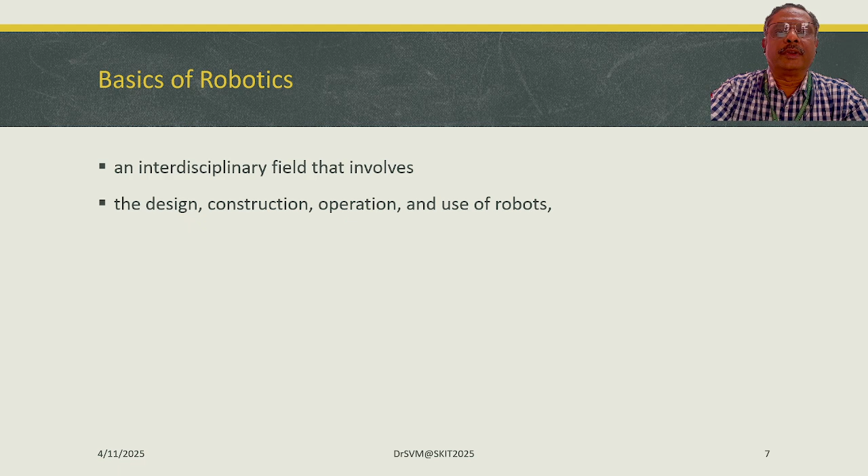Robotics is an interdisciplinary field that involves the design, construction, operation, and use of robots, which are focusing on creating intelligent machines. The major focus is to create an intelligent machine that are created to assist humans in various tasks. The main objective of robotics is to create machines that can perform tasks, often repetitive or dangerous ones, more efficiently and accurately than humans.

That's where we began our journey, when we have activities that are more repetitive. It becomes boring for any human to do the same activity, the same action again and again. So when such a situation is there where some actions are to be repeated multiple number of times, then we would prefer some system like a robot to work on. Another situation was when it is dangerous, so it is hazardous for humans to operate. In such situations, it is recommended to use machines that can simulate human activities. So that's where we began our journey, with simple human activities that are more repetitive in nature and which are being performed in hazardous situations.

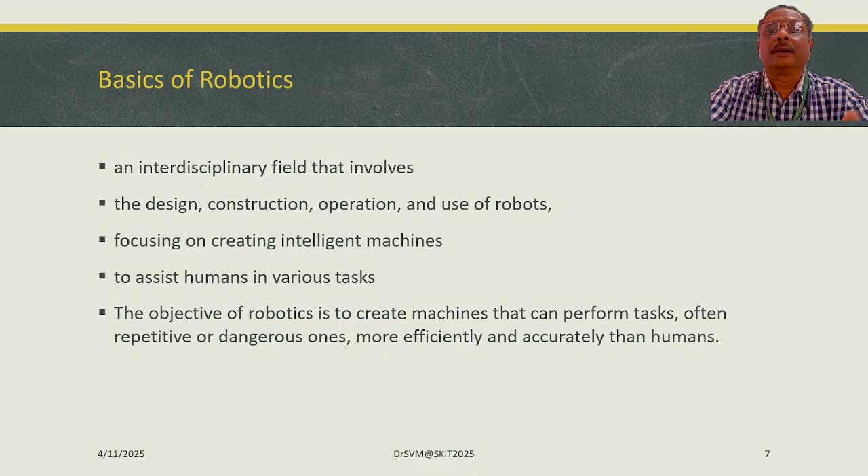The major idea was to replace humans in tedious tasks, or hazardous tasks, or tasks that require very high precision. So we can make a machine work with more precision as compared to humans. If tasks involve a hazardous environment, then instead of humans, we would prefer a machine to work with. If it is tedious, like it needs more repetitions, or if it requires more power to work on, then it would be advisable to go for machines instead of humans.

Then the next thing is to augment human physical as well as cognitive abilities. Yes, since centuries we have been augmenting the physical abilities of human through machines, but now we are into a situation where we can even think of augmenting the cognitive abilities of humans by a machine.

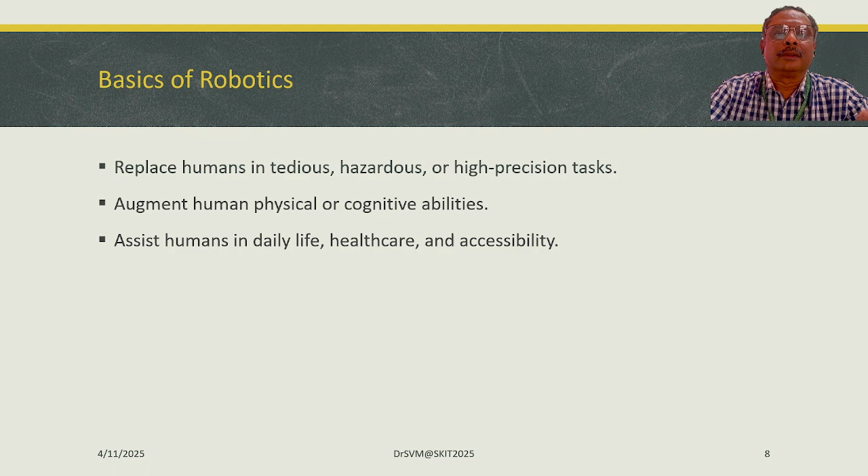Here, we would like to have robots that can assist humans in daily life, like healthcare, accessibility, and so on. So if it is healthcare, a human may forget things, but a machine cannot forget once it is properly programmed, once it is properly designed. So it would be easier, it is recommended for machines to assist the humans, to be precise, not replacing but assisting the humans in daily activities.

They are very much helpful to operate in extreme or remote locations where humans cannot reach. Extreme locations like where there is too much heat, too much cold, or lack of oxygen, or any such situation where humans can work only with great difficulty. In such situations, we can make our robots work there.

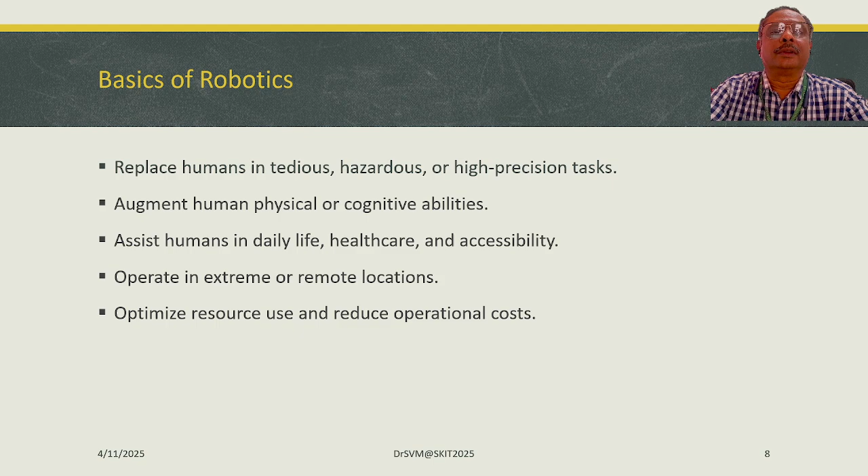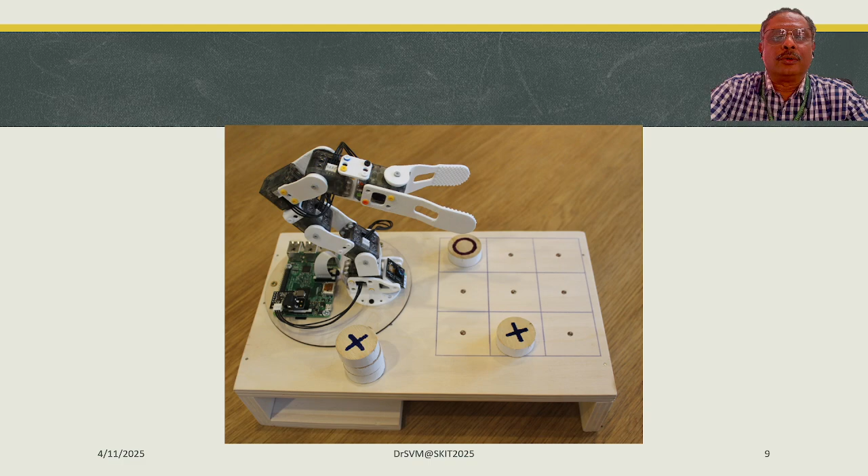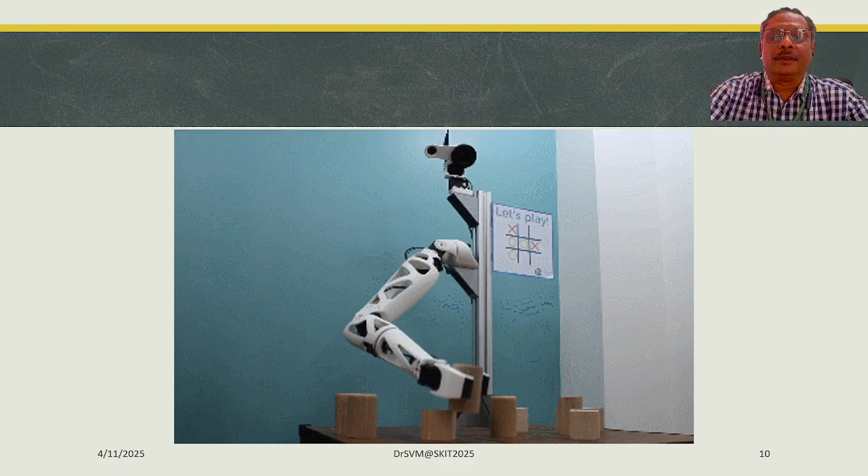So for doing this, we need one to observe the state of the environment. For that we may require some input devices, and then we want to make the movements, so for that we need output devices. The input devices are called sensors. In the previous example we had seen, we used a camera to look at the board and get the information. So we use the camera to see the board and understand the situation, using image processing or computer vision tools. Once we understand the situation, then our system can make a decision on what to do next.

That means pick one tile from the place where the tiles are placed. For that, we need to move the arm to that location, then pull the arm down, hold the tile, move the tile up, rotate and get it over the correct position, then move down and place it on the board.

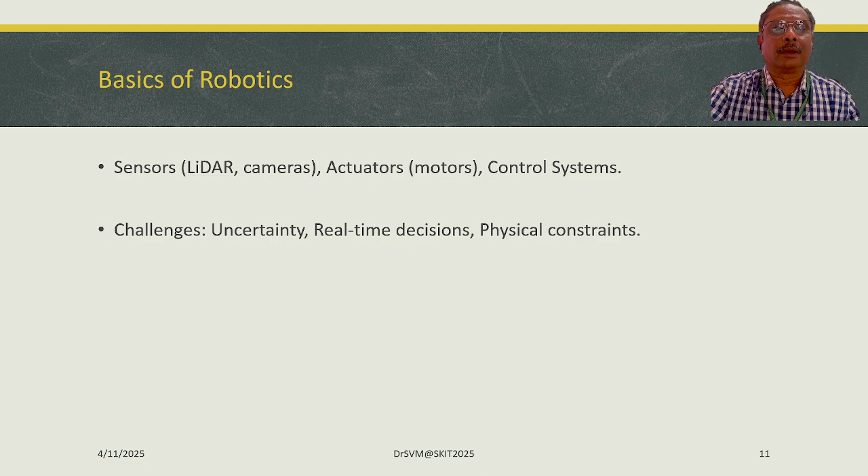Exactly where to fetch the tile, for example. If we want things to be simple, it has to be placed exactly at the same place all the time, but it's not necessary that we can keep the tiles at a given position all the time. It can be located anywhere. So if I want a nought tile, my robotic arm should move around and find the next nought tile available, pick it up, and move to the correct position.

So there is a lot of uncertainty here, and we need to make decisions, and these decisions have to be made on a real-time basis.

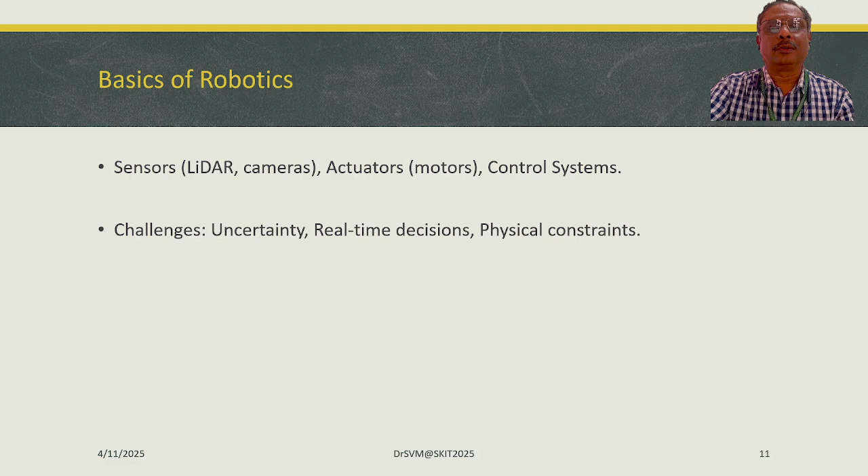There are many physical constraints, like the capacity of the actuators or the resolution of the input cameras. We should take all these challenges, like uncertainty in the situation, getting the work done in real time, and handling constraints, and overcome all that. We need to create what we call a robot for a particular application.

So that was our basic robot. What we are expecting for our future is human level autonomy—robots that can reason, adapt, and learn in a dynamic environment, not just playing a tic-tac-toe game.

So instead of a 3 by 3 tic-tac-toe, if we make it 5 by 5, it should still work. And instead of tic-tac-toe, if we shift to chess, it should be able to work again. Any changes in the rules should be adapted to, and for whatever actions a robot is taking, it should be able to give proper reasoning why it was done, and it should be able to learn and get adapted to new environments.

That's how a human gets adapted. Just by looking at a few rules, a human can learn how to play. The first time, the human may not be good enough, but if the game is repeated again and again, each time the skills get improved. That's what we call humans learning better and better to play the game, and we want the same thing to be adopted by robots.

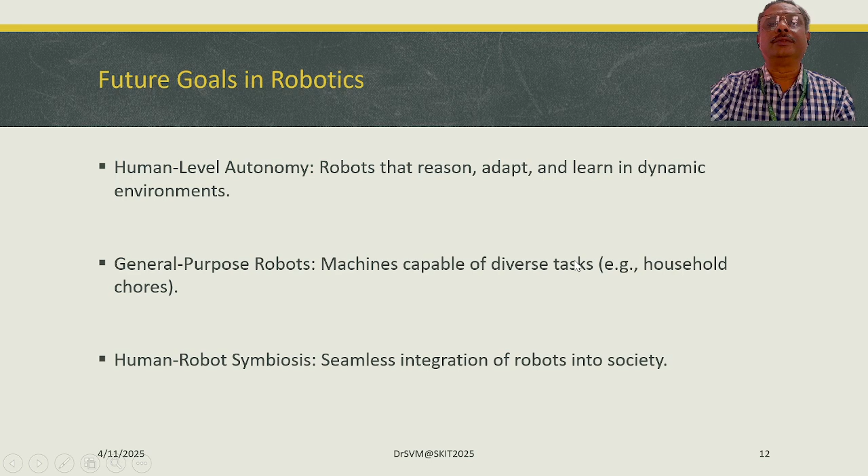And there should be human-robot symbiosis, that is, seamless integration of robots into human society. The introduction of robots into our day-to-day activity should not disturb our social life. It should not replace humans, but instead help human society to improve and grow together instead of creating a problem—it should help the society to excel.

So the next thing we would like to see is why reinforcement learning is well suited for robotics. That's what we look at in detail in the next session. Please keep watching. Thank you.